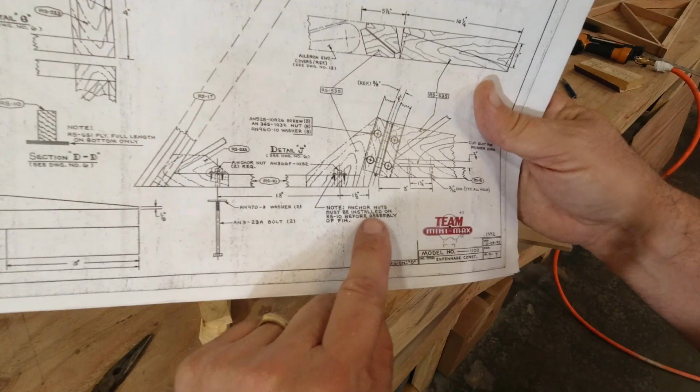All right, so we've got one more thing we have to do before we actually get this in place. I need to do it now so I don't lose track of it, and that is where the rudder yoke is positioned. We need to find where that's positioned and make sure we get that in place. I see it's right here. I'll show you on the drawing how it tells us: we are 3 inches from this corner back, and that puts us in the center of the rear hole.

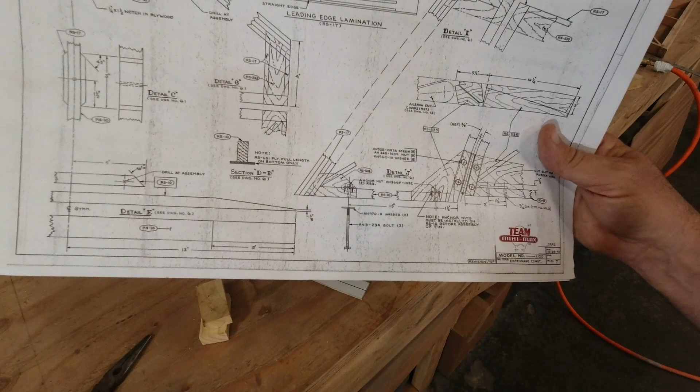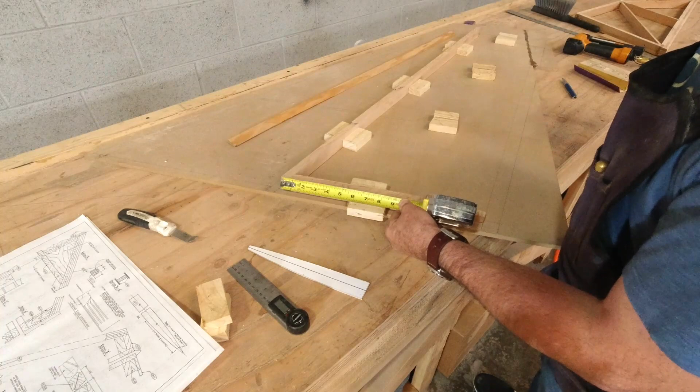So all we have to do is get our yoke out, and since we've already got our center line drawn on our piece, we'll mark where that 3 inches is. That'll put us in the center of the rear hole, and we'll use the piece since it's already made to match that up. So with this in, our 3 inches is from that forward corner right there. I'll just take my tape here. We're gonna measure 3 inches. Let's make a mark there. All right, so that's going to be the center of the aft hole. That's right there, and we'll just square that off.

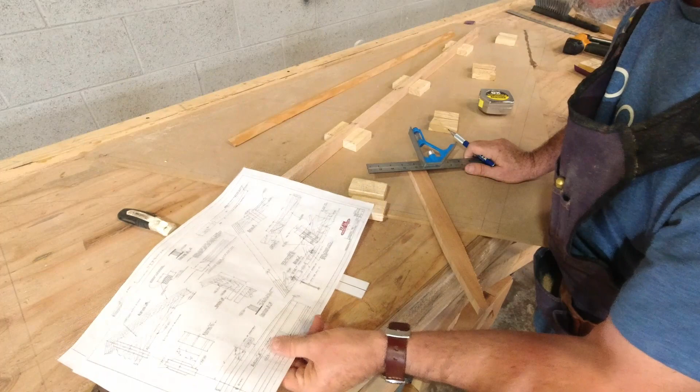Except we need to be on the top side, so let me flip over here. That 3 inches is actually measured on the bottom and then transferred to the top. So that's this right here. And we'll get that line. All right, let's grab our piece. So we got our piece here, and now 3 inches.

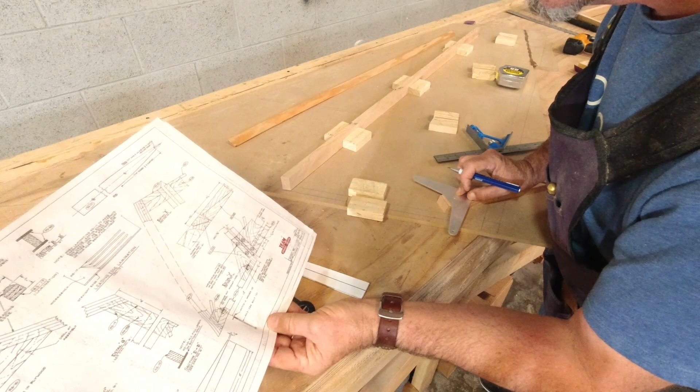So now to square this up, we'll just make ourselves a mark here, and that's the aft hole for sure. I'm just going to make a mark right here. So now we should be centered on our hole and centered on our line, and we've got something parallel to look at to make sure we stay there. That'll help us punch the rear one. We're gonna punch this spot right here. Make sure we're good in center. All right. Drill press 3/16 hole, and then we'll get this thing going.

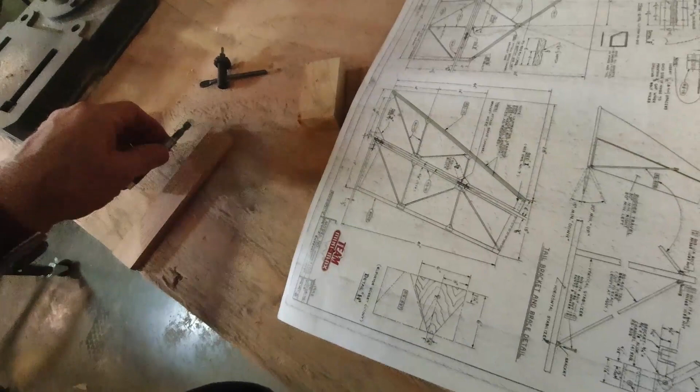So I'll get those. They're all, as when I numbered them originally, it was pretty simple. So I believe these are like maybe 1 through 6 on there. So let me grab those, and then we will do the same thing we did before. We'll go to the sander and I'll bevel all the edges on those, and then we'll get prepared to put this on.

All right, so I've got everything situated here. I have this ready to go, and so what I'm going to do is mix up some epoxy. I've got all of these with their bevels on them, so they're ready to epoxy on. They're sanded on the back side. So the next step is get some epoxy on here. First, I'll mark where all of these go, so we don't lose track of that. I marked here and kind of up here where this number 13 gusset goes, and you can see that shows me where I need to put epoxy on the wood.